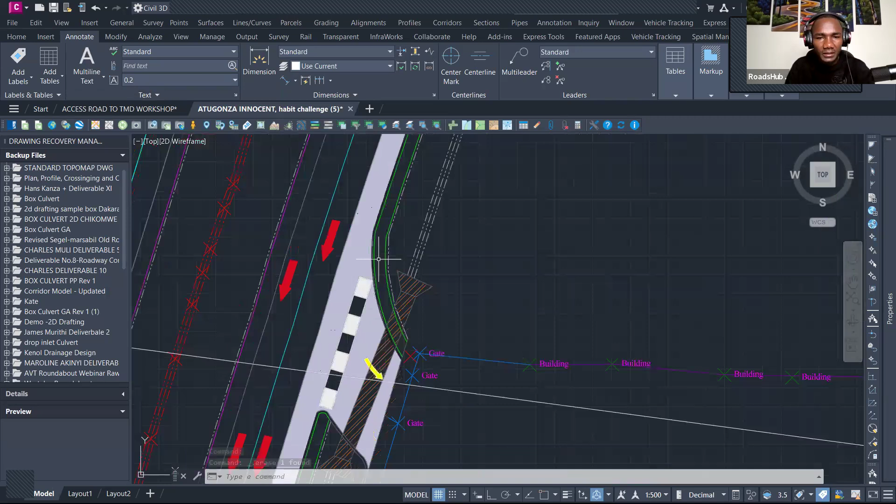I'm looking at the geometry at this point. This looks good. The vehicle can be able to maneuver. I would like to know what exactly is the width at this point, because if we check that, okay, 3 meters. That's perfectly good. All right, fairly good. The culvert is right there, well positioned. Remember, we said that there should be a safety aspect at this point, at the central island for the property. Sometimes we prefer having bollards because remember, this is like an additional lane that you're handing here.

And sometimes the authority may not require you to have this, because it may encourage a U-turn for most people or for most of the drivers at this point. So you can introduce bollards at this point so that you close it, so that even the main traffic does not use it as a place to do unnecessary overtaking and overlapping.

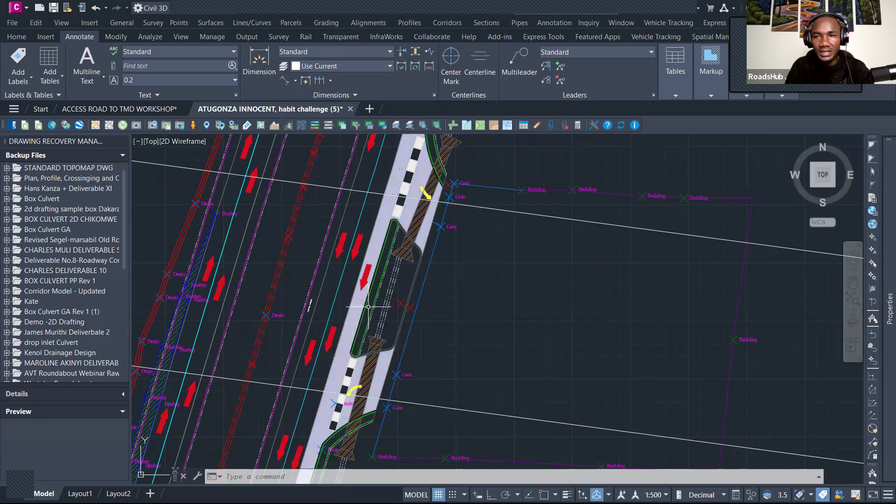Because if they do that, then there's a high possibility that they will cause a collision with the vehicles that are coming from this point, or they will use the deceleration lanes as a point to overtake. Therefore, that is why there is need to have safety barriers here, bollards, and of course restrict this section. It will also improve the safety of the pedestrians who are walking around this section.

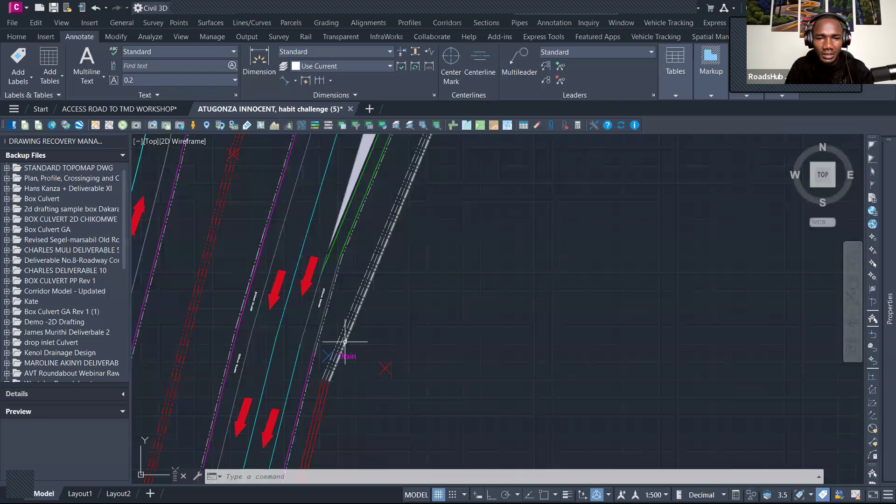All right. But I'm worried this angle doesn't look very nice at this point. So the turning may be difficult here, but that is fine. You can check it. I don't know why you are having two accesses here. But anyway, I will just assume that probably you have another road at that section. But generally, this is a good perspective.

This gentleman decided that for him to have a U-turn at this other point, because of the restrictions in the size of the central island at this point, he decided to have a jug handle, kind of an intersection here to divert traffic from this point to move it over here, which is a smart move. But then again, it's dependent on the amount of the road reserve that you have here. I like it. It's good to see that you're implementing that.

And for example, if I take a look at this one, this is 43, a bit below the radius that you expect. I don't know what is your design speed, but because you anticipate this is a very low speed section, we can say that the design speed is probably something like 40 kilometers per hour, so that it can allow such a small radius. Okay, this is fairly good.

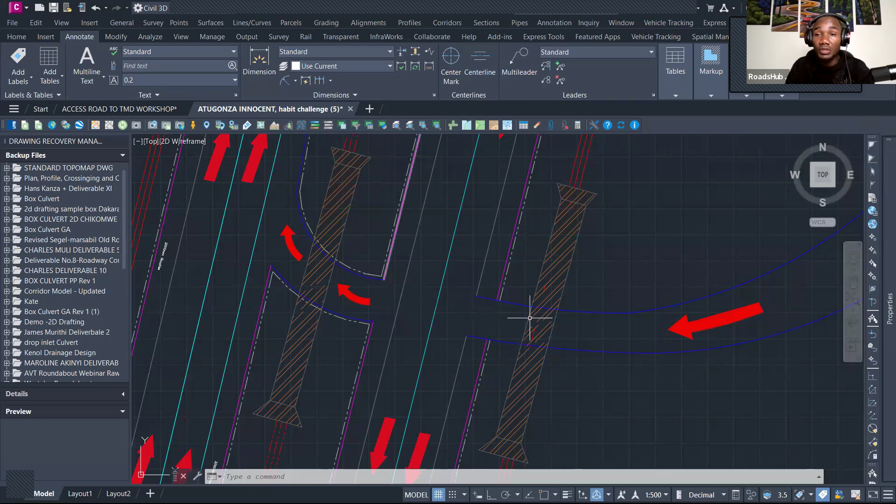But this means, because this is now a crossing, remember you're introducing some additional conflict points here. This is always the challenge. When you bring another solution, it will always bring a new problem in the intersection. And therefore, it's bringing more conflict points here because now it's crossing the entire highway. But the beauty of it is this one can wait until the road is clear.

In some instances, such an intersection may require signals or may not require them, depending on the traffic capacity or the traffic volumes that you have within your section. That's good. I like that you're experimenting with new concepts, which is truly amazing.

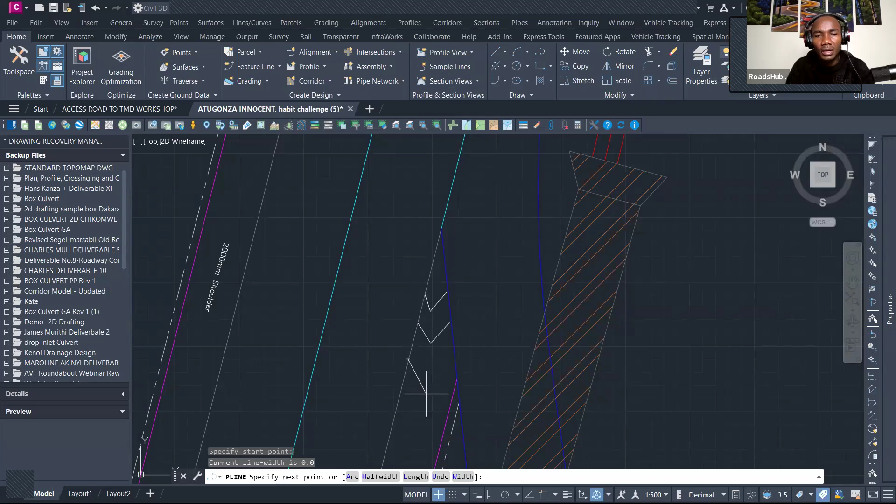Okay. Remember also when you're designing, this section should be a chevron. Chevron is a marking that is showing the direction of traffic. So there will be some arrows that look something like this. I don't know whether you've seen this on the road. They are called chevron markings, so that the motorists are guided accordingly to move all the way to this section, so that it does not become a black spot for motorists to cause accidents at this point.

Remember also it needs to have curb on this edge and this edge to protect this specific section and demarcate it, not to cause accidents at that point. But generally, it's good. It's always good to see you guys experimenting with other concepts. I would like you now to share it out with other people so that you can get feedback on what you need to do.

This is my only area of concern. It doesn't look like you put so much thought on it. So please think through it. Refer to a session where we were reviewing Engineer Samuel Munoru's work, and you will see that this is not very feasible when it comes to the turning of a large truck vehicle. That's my feedback for you.

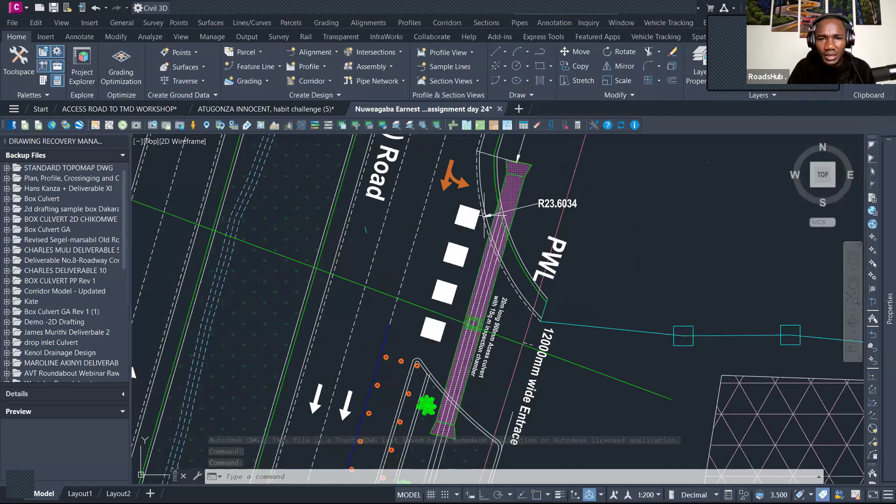There was another gentleman who sent in his work, but I don't know whether it's up. There was this other gentleman here. He's calling himself Earnest. This is Earnest's work. So Earnest has done a very good job. The annotation is good.

Yes, he has implemented the safety aspects that we talked about, especially for this section. Remember, when you are opening this section, it's not a road section. That is what we were talking about. The culvert is well aligned, but now the problem is you don't have drainage on this upper side. So the question is, where is this culvert?

What is this culvert doing here if you only have drainage on the lower side and you don't have drainage on the upper side? So that's something that you need to think about as you get to finalize your design. Your design should be complete and continuous. So please take note of that, Earnest, if you are in this very session.

Also note that it would be economically unfeasible for the developer to continue constructing the walkway all around the road section all the way to the end. So sometimes you need to terminate it at some distance here so that the next developers or the government can proceed installing the walkways on the other side.

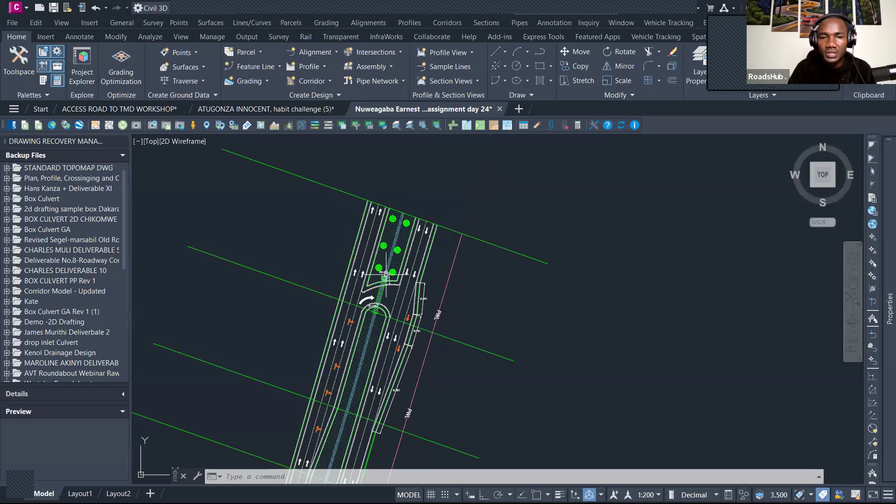There's no developer who is willing to do all of this for like 1.5 kilometers. Unless, of course, they want to connect it with the intersection here or the U-turn here. That is when they can proceed. This is always a topic of debate, especially when it comes to the practical implementation.

The radius here of 7.37, this of course allows the small vehicles to be able to turn. Again, I told you this section, you will need a far much wider section here to allow the turning of the large truck vehicles. 3 meters is not sufficient, and I think we saw that depending on the design vehicle that we're using.

For this intersection, the passenger car and the medium trucks can be able to turn, but when it comes to larger traffic, it may be a bit of a challenge to turn around this section.

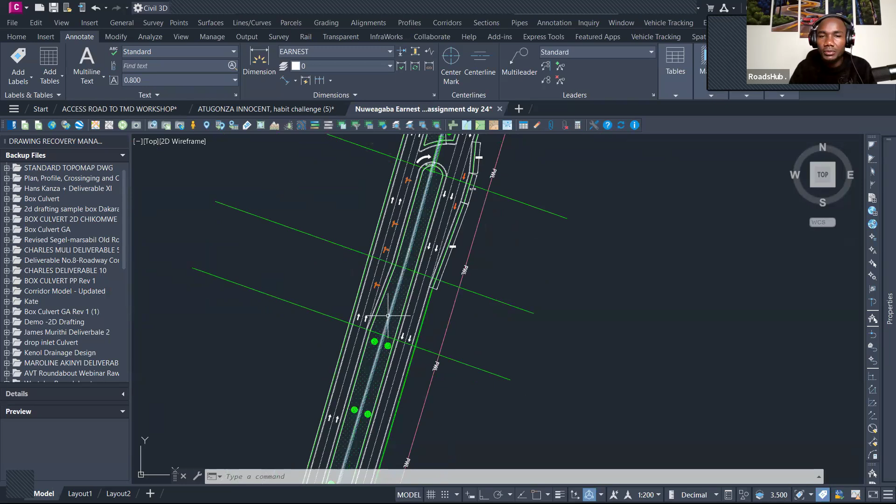I know most of you are asking for the vehicle tracking. The vehicle tracking comes with a license, and I cannot issue the licenses to you guys because they are already fully booked. We don't have any extra slots; we have already given them to the people who are already in the program, so we don't have extra licenses.

You cannot get the vehicle tracking as a crack version. It's too difficult. You need a license to access the vehicle tracking. I saw a couple of messages and I decided that I would clarify that during this session right here.

Okay, super. I like this. This is a well done design right there. It's appealing. I like the choice and taste of your colors. And as you've noticed, you only become good when you do this. And I will always repeat: you may think that you've known it, you've been listening to it, you picture it in your mind and all of that. It's only until you do it. So I'm encouraging others to do it.

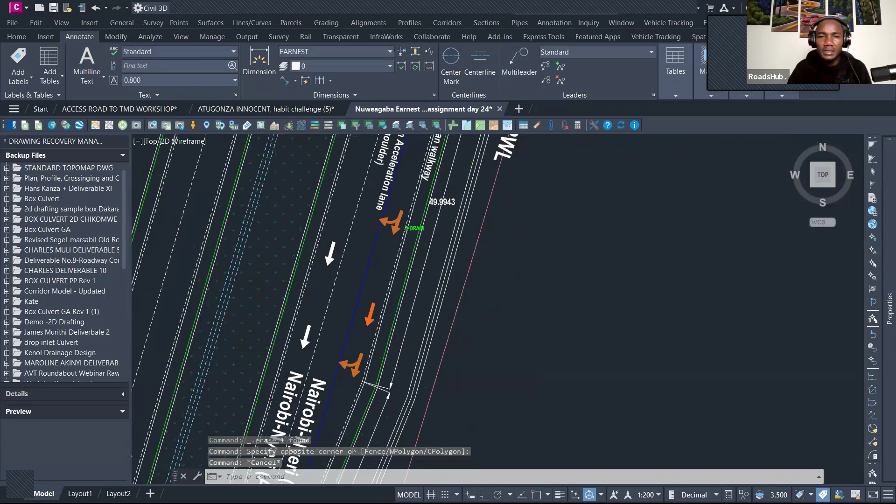Then when it comes to showing what you're doing with your drainages, drainages are best shown using broken lines so that we can see them. So please think through that. When it's a solid line, it gives another vibe, so to speak. Yeah, but this is good. I like it. Let me see this other section.

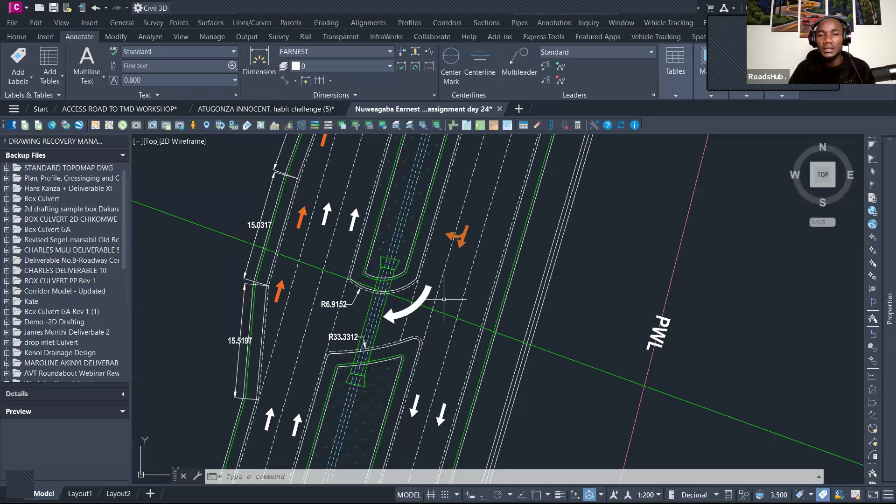Okay, your radius is 6.9 and the same concept. This concept could be very good on paper, but it needs to be tested using the vehicle tracking, or rather the swept path analysis, so you can see the performance in real sight. But this is amazing. I love it. I like that you guys are getting yourselves out there to do stuff. I'm super, super proud of you.

So to this effect, I'm going to jump straight to preparing for our presentation, like we earlier said. And one of the things that we're going to use is this specific title block. That is the work that is here for us today. And therefore, how do we approach it? How do we get to start our work for presentation? And how do we prepare for this?

I know for those of you who have probably completed one of our trainings, we've been working very hard with Hans Kanza to make sure that you get to do your production very well. But even for those of us who have not been able to do it, then we can do it together. Just as a recap, we have 3 sections within a title block. Like you can see, we have a section that is going to have the viewport. So this is the section for the viewport where the drawings will be presented.

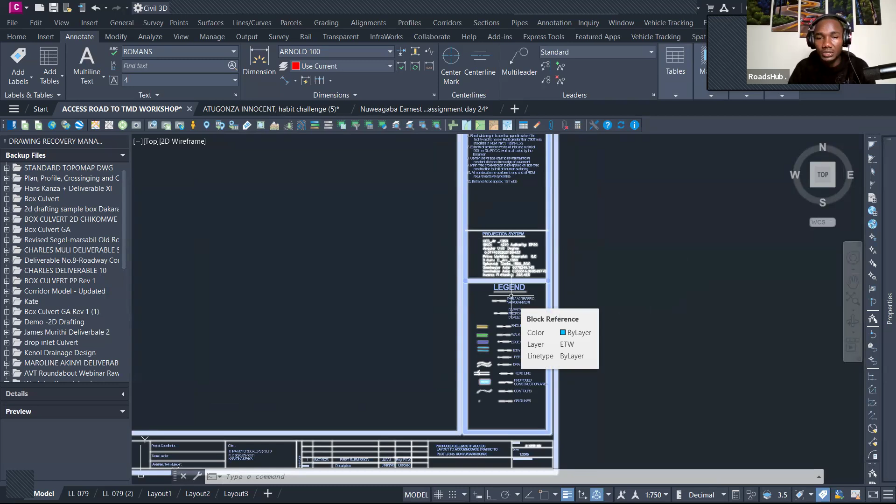Over and above that, we have the bottom one, which is showing the project details. And of course, this is going to vary from project to project. So let's get into it. I don't want to use my own design. I can go to this gentleman's design. I think this is Ernest's work, and I can use it to display or to create that specific title block that we have.

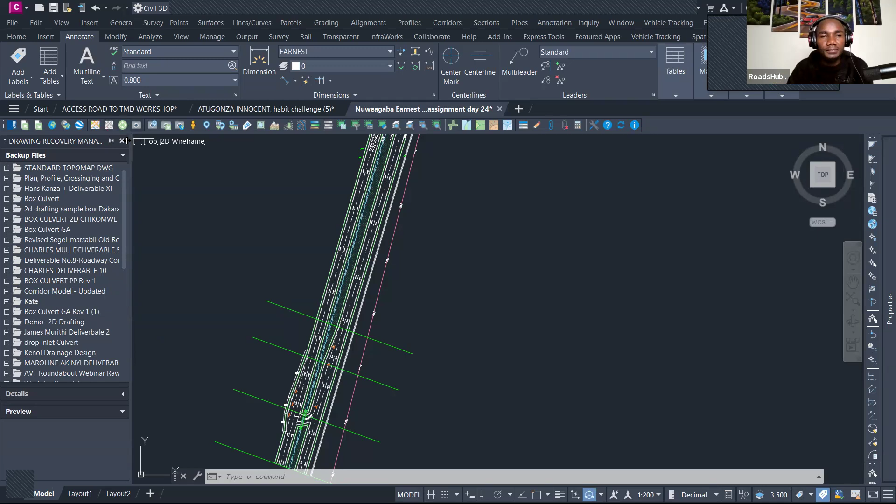So the other thing that I wanted to bring is when we are talking about title blocks, Autodesk has already given us some samples. It has some already existing types or samples or templates for title blocks. So there are people who would prefer to use those templates and then customize them. And then after customizing them, they can use them in their own project.

That is one approach. The second one would be, of course, starting your own design from scratch. And therefore, this means you can just design your own template, come up with your own. I think that's easier. It allows you the flexibility and ability to customize and then just have your own preference and taste on that one. So let's get into that.

We're going to go to layout. And once we go to layout, remember this one, there are two ways. We were in the model space. So this is where we do the drafting and all of the work. And then after that, you go to the layout. And in the layout, that is specifically where we are going to do our presentation for the design. This layout has different aspects. It's called the paper space as well.

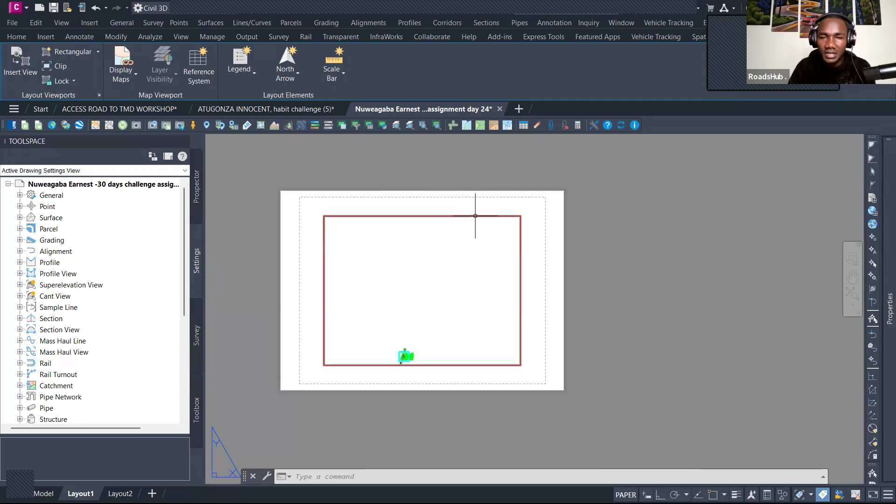Remember, you can toggle between; if you go at the bottom of your screen where we have the quick tools, you have the ability to switch from model space to paper space. So at the moment, it's showing that we're in the paper space, and this is where now we do our drafting. The red thing here is called a viewport, and therefore this is where we get to select the elements that we can show from the model space. So it zooms, it's an area to view what is already in the model space.

But that is something that we don't need for now, so we can delete it, and you can always create it using this option where you can say we want to insert a new viewport.

I'll show you that in a minute. Now, there's something that I want us to do.

I want us to look at this contextual ribbon that is at the top of our layout views. The first panel is the Layout Viewports, where you can control the viewport, the one that I've deleted. You can see the first icon is to insert a viewport.

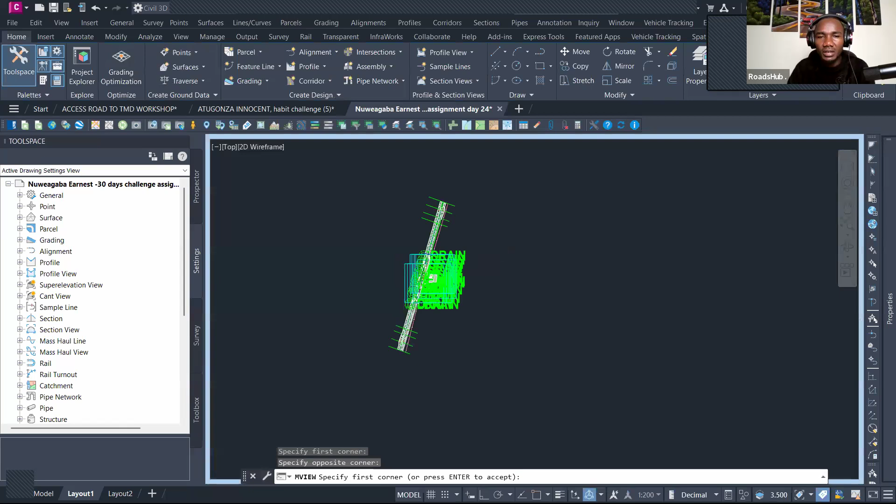This one means we want to go directly to view a specific section of this element. So that is one way of inserting it, and you can see that's how I've done it. It has already shown that selected section that I have brought into view here.

I'll repeat that again. I can delete the viewport right there. Then in this contextual ribbon, I can say I want to insert a view. This is where you insert a view directly or automatically from the design itself. So I would come and say I want to have a view for this section.

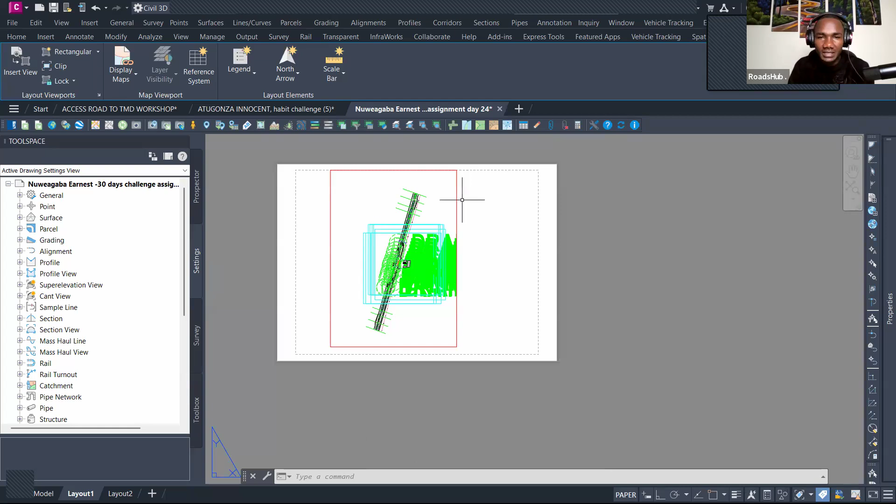Once I select it, I press enter, and this view will directly be projected into my design. So I can specifically show a specific element or section of my design that I want to show here. That is one way.

I can delete it one more time. There is another section where I can create a rectangular viewport. This means I'm just going to highlight it on the viewport, and it will display the selected rectangle, projecting what is now in the model space. I know you're wondering why this one is looking so weird and out of place, but I'm going to take care of that in a moment.

Now, the second thing we need to look at is this viewport can be edited. You can squeeze it, make it bigger, make it smaller, or even have it at the top of the section. It's just like a polyline, just like a window—you switch it out to sections that you want to display.

Remember, this viewport's scale can be locked or unlocked. If you go to the last section, there is the lock and unlock option. For example, this one looks like it's locked. We can unlock it by selecting unlock, going to this one, pressing enter, and this viewport will be unlocked.

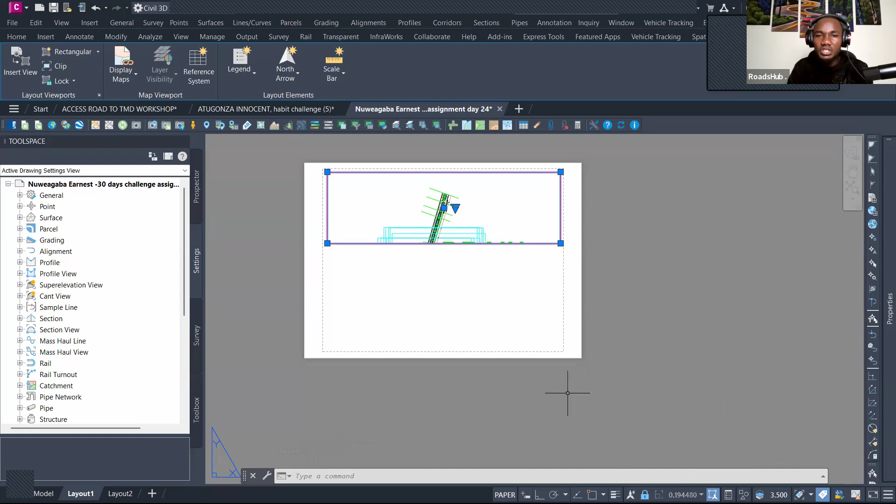The other way is if you select the viewport, at the bottom corner there is an option to lock or unlock it. When you lock it, you cannot modify anything inside the viewport. But if you unlock it, you can right click inside the viewport and modify the display that is there.

The second thing is the viewport has a scale. If you select the viewport, at the bottom next to the lock, we have the scale of the selected viewport. The reason our design looks distorted is because this scale does not commensurate with the scale used in our model space. So if you select the drop down, we can set it to, for example, 1:1000.

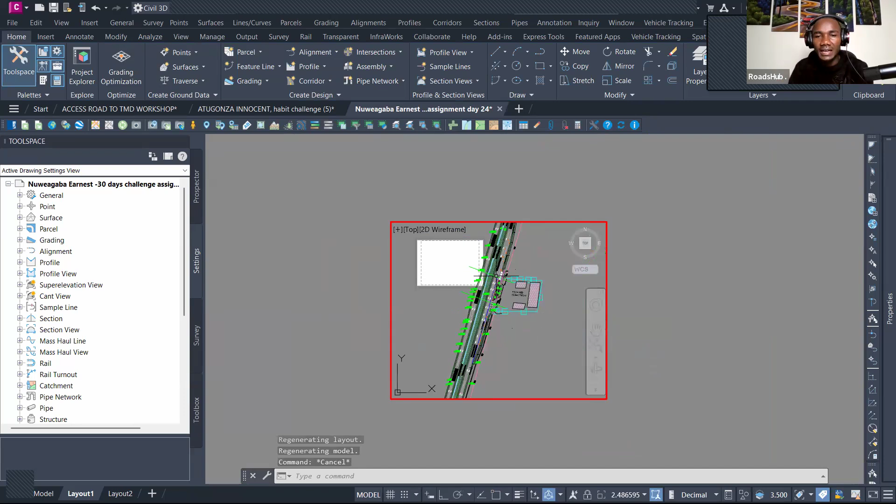You can see the display has dramatically improved, and we can possibly see the different elements here. If we right click and use REGEN, it refreshes so that the paper space can adapt to the scale we have used. You can see the elements now are being displayed better and better—we can read and see everything in detail.

So that is just a play around with the viewport. Remember, if this is not very visible, you can tweak it, return it back to the paper space, and always use the viewport as a tool to play around with.

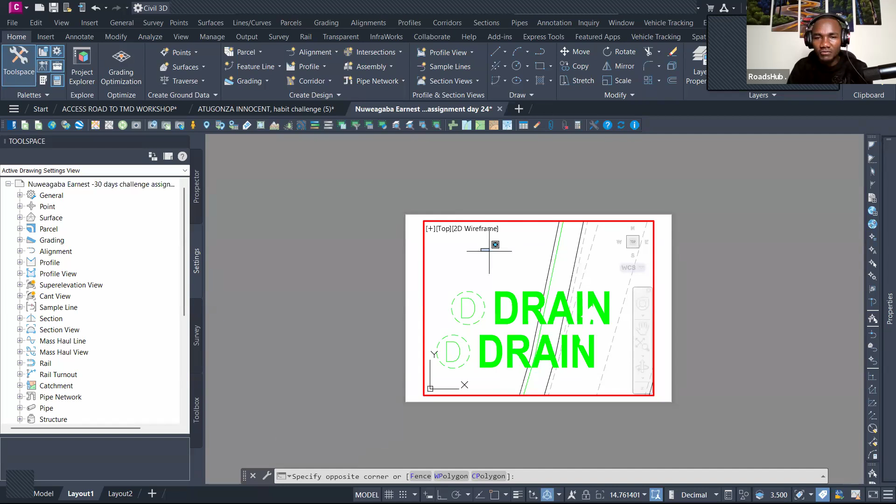For example, the other option is this one extremely zoomed. You can right click or double click into the viewport. This means we are working in the viewport, and you can use the zoom icon to bring your design into perspective. You can see everything has been brought into perspective, fitting into your design. Then escape and click outside the viewport, and you see everything is extremely visible if you zoom out.

This is work that requires you to be a little bit careful, easy and relaxed. Don't be in a hurry to work with it. It's something that requires just playing around with it until you get to master how this works for you.

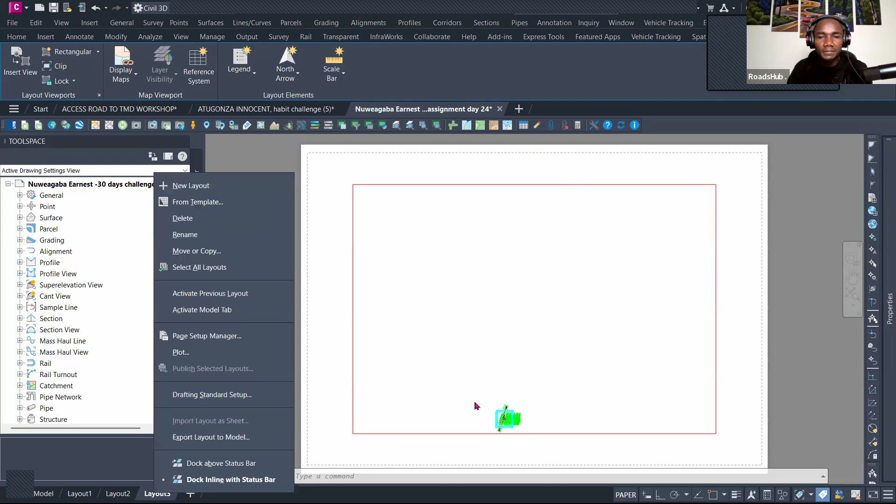Now let's go into preparing a complete, brand new paper space or layout. I want us to go and delete this one. Remember, you can always delete all of them. You can even delete this other one. This is what we worked with, so we can also delete the second one right there.

I want us to use the plus icon. This is now the step-by-step of how you are doing it. I was just doing a preview of some of the things that we'll be using, and now I want us to go to the step-by-step process.

The first thing is we want to create a new layout, so this one has called itself layout number 3. Once we get to layout number 2, we are going to right-click the layout, and then we want to rename it first. So what do we want? We want plan layout, and then we can call it A1.

So probably we are using paper size A3, or if you want to use paper size A1, you can be able to rename it so that it's super clear for you, then press enter. At the bottom of the paper space, you can see it's called plan layout A1.

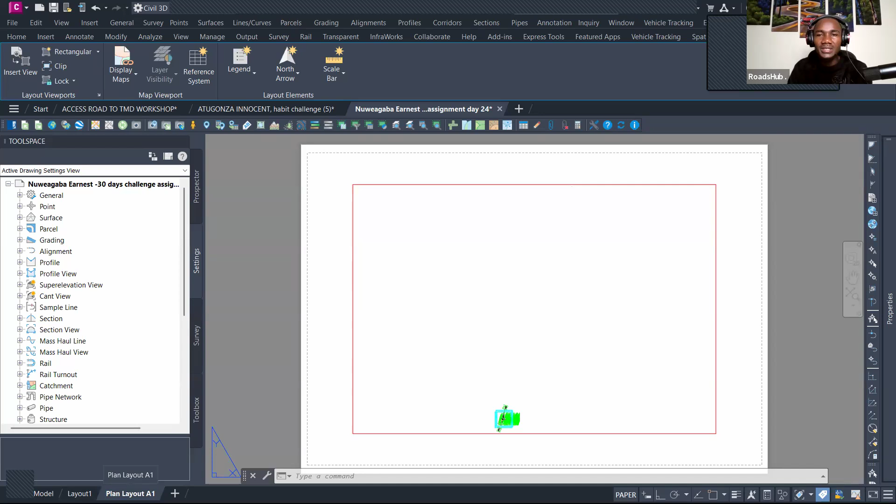The second thing we want to do is set this paper space to be specifically the size of the A1 paper. So how do we do that? We select the plan layout, right click, and once we right click on this one, we go to page setup manager. This is now the page setup manager displaying on our screen.

Remember, this is where you can also modify all of the other layouts that you have, and in this case you can create a new layout as well, or create a layout from here. But in this case, we want to modify.

Most importantly is the plotter or the printer. Remember, in this case we want to generate a PDF, but you can also generate directly to a printer - this is the printer connected to my desktop. But if I wanted to go all the way to AutoCAD, there is something called AutoCAD PDF high quality print. That is what I mostly use, and that is good enough for me.

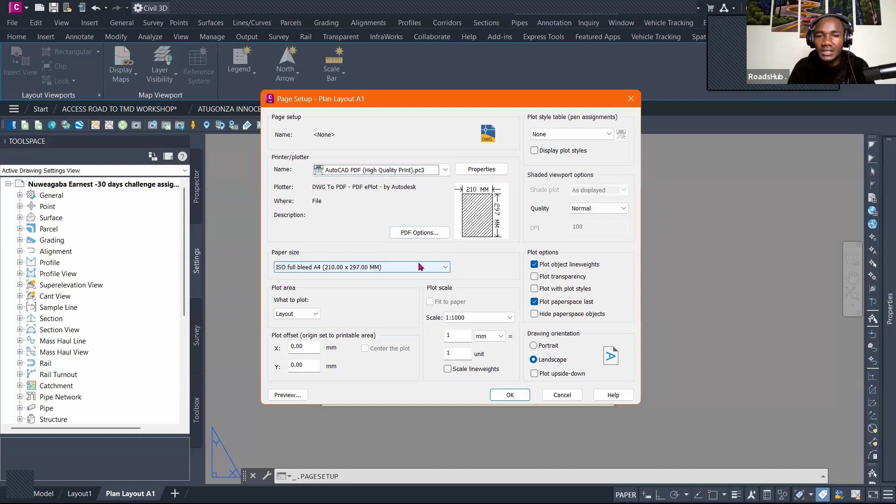Then after that, we go and select the paper size. Remember, we renamed this to ISO A1, so I can go to ISO full bleed A1. And remember, if you go to the bottom right corner, you will see the drawing orientation - there is always the option for portrait or landscape. So this is where you determine how you want it.

So for the portrait, you can see this is 420 by 297. If we wanted an A1, the A1 is right here, which is 841 by 594 - these are the dimensions. And remember, I always prefer using ISO full bleed A1, yes. It covers the entire space very well, and the scale is easy to modify, and when you go to printing, it will fit in very well.

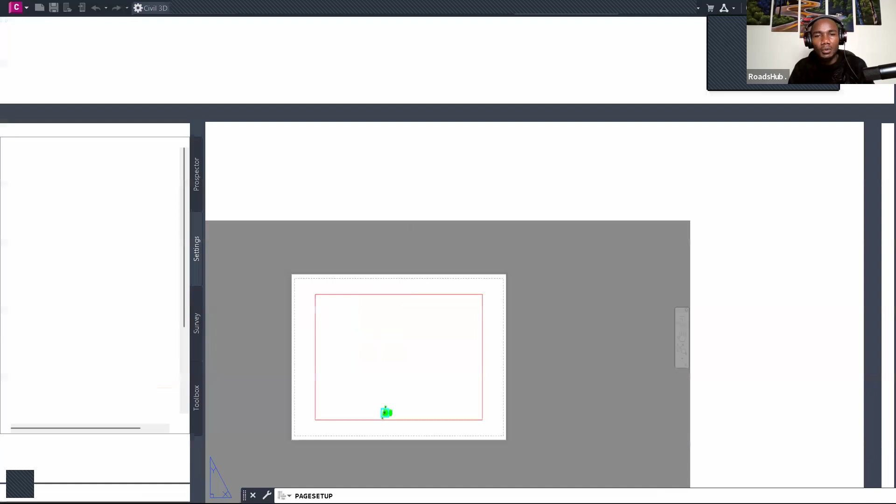Once we do that, you can preview your paper space, how it will look like. So this is how the paper space will look like, that's the size of the A1 ISO full bleed. The other one is the quality here.

I would want it to be maximum quality. Of course, this is going to impact the plot time. The other one is the drawing orientation. I want it in landscape. If you want to set it as portrait, it will also be a portrait in this case.

So after I do that, I can set OK, and then close it here. You can see now the paper size has increased. Remember when we were using the other one, it was an A4, and you can see where our viewport was. But now you can see this size has dramatically increased.

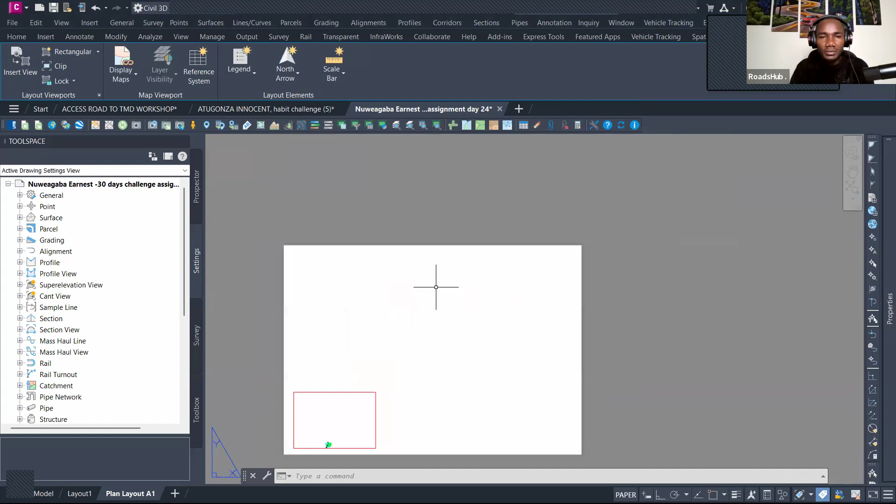So let's go down into creating our title block. I'm going to go back to this design and just look at it. You can see we have 3 sections: a section for the notes, a section for project details, and then a section to display the design. And above all that, we have this whole rectangle that is here.

Please note that there is nothing complicated here. It's just a matter of playing around with polylines. So for example, I can create a rectangle.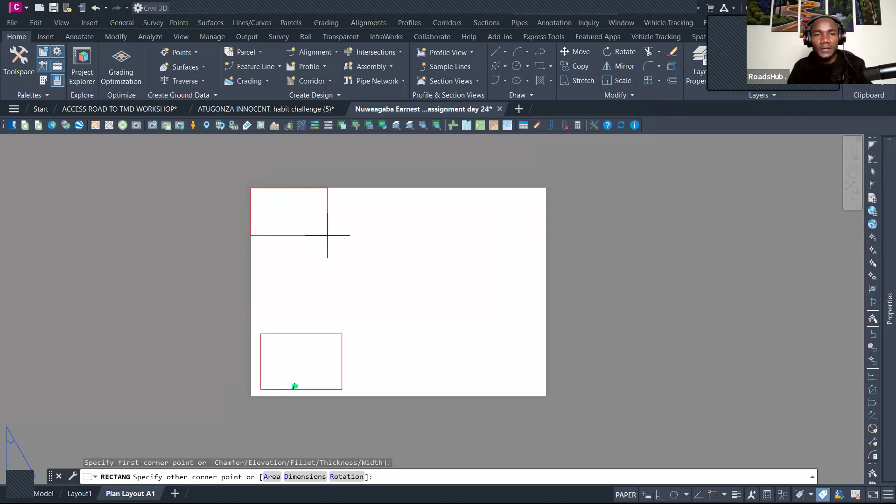The other thing that we need to look at is the layers. So we can create a new layer. Once we go to a new layer, we can call it title block. And then we can choose the color, so for example, we can say we want it to be white.

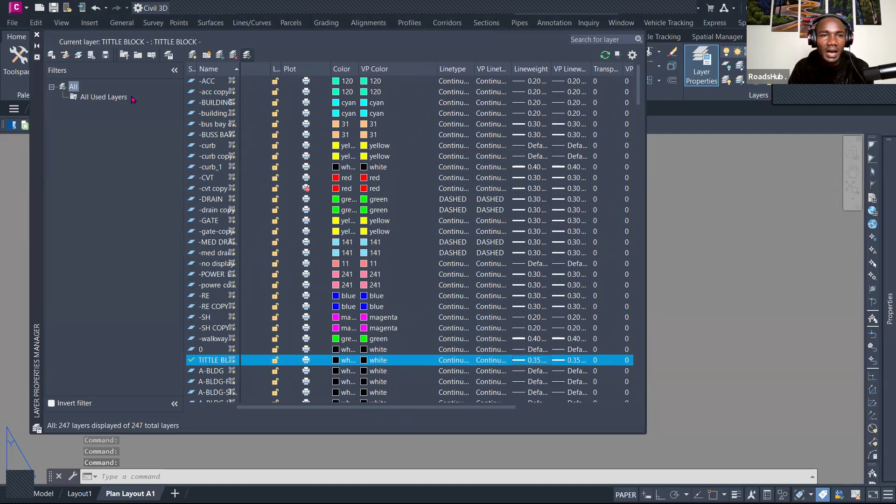And then we can choose the line type. It's continuous. The other thing is the line width, so we can use a bigger line width, a thicker line width, because we want to have a title block in this case. And then we make it the current layer, and we can exit at that point.

So come back to the rectangle, and we want to demarcate the entire section to have a rectangle all the way to the edges right there. Okay, so that is it. That is our first edge of this one.

So for example, we would want to offset it. Remember, we showed just a small offset. This one can be an offset of probably even 25, 0.025, and then we can have it there. Remember, these ones are very small. You don't want to have a very big offset for the section.

So after that, we can actually delete the viewport. We don't need it for now. Therefore, we want to demarcate this into 3 sections for our project, and the first section is where we have the project details.

So we can select another rectangle, and for example, in this case, we can say we want to have it here. Remember, there is a process where there are some templates that have standard dimensions for your title block. So for example, there are people who would say, I want mine to be at 60 mm in width. Others will say, I want this one.

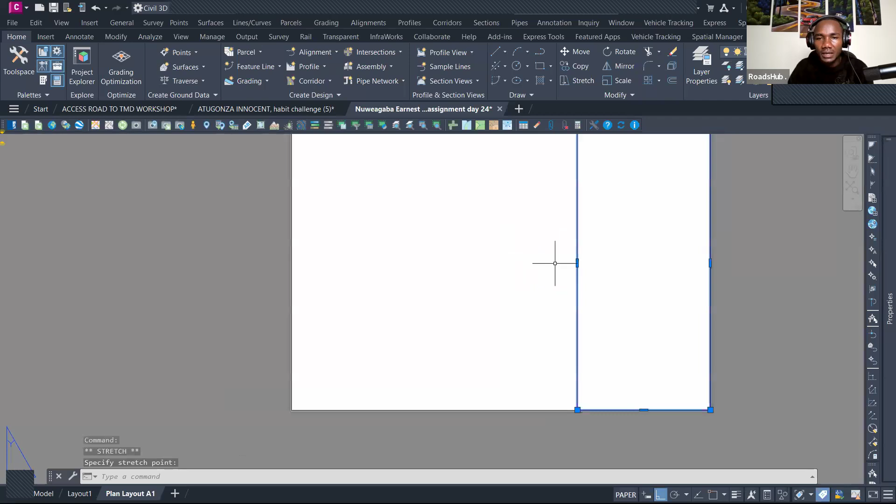But in this case, you can just decide to give a section that is good enough to accommodate your notes. So we can decide we want to have our section up to this point. And then I can make it probably just a little bit bigger. Remember also you need to turn on your ortho mode to ensure that, so I can make it a little bit bigger.

Probably that section is fairly good. You just size it, because also remember the size of the projects you'll be working on will vary in size, and you want the display section to be the bigger thing, because we'll be having the display section here, and we'll also be having another section at the bottom which is going to display our project details at the bottom right here.

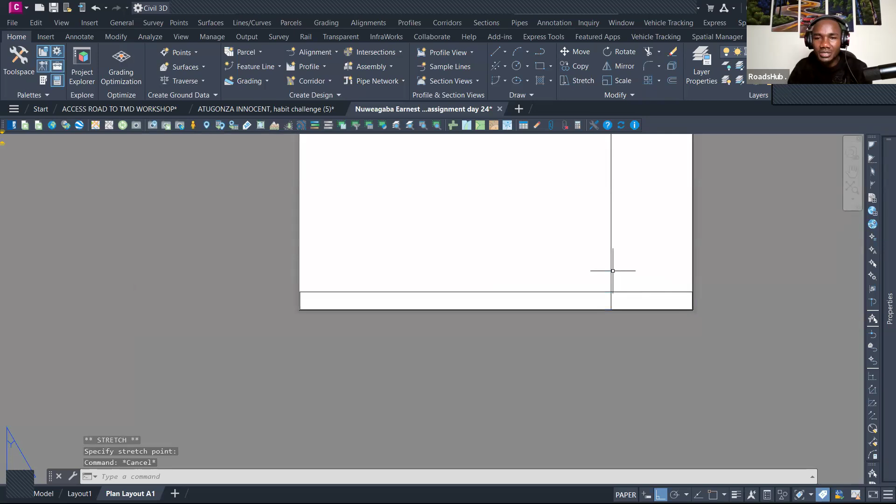So there are instances where people will tell you, I want my title block to be of these specific dimensions, I want it to be this one. And therefore, I don't want to go into that because it can be a little bit confusing for most of us.

So I want to assume that we are all working with just a rough picture of what this would look like for us. So this one can terminate to that specific point. Then we also make sure that this one is hinging at that point, and this one is hinged at a specific area. So once that is done, I would like now to have the titles.

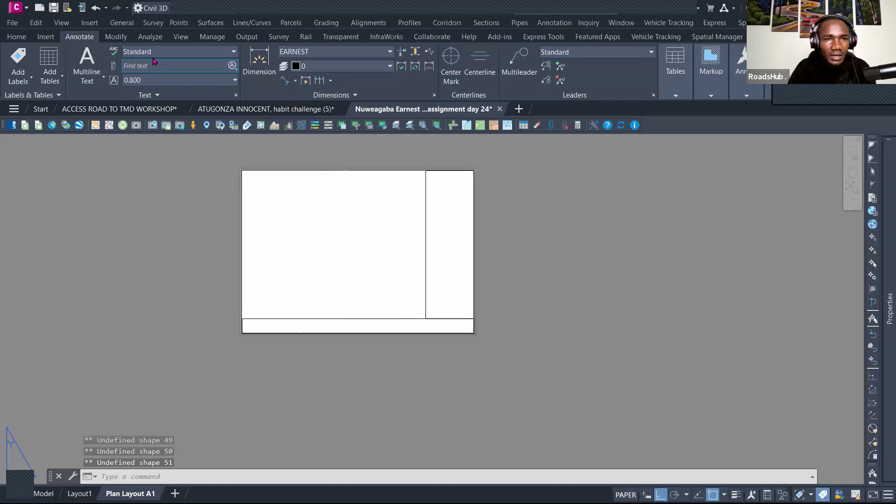So I'm going to annotate. And I remember this gentleman has created a dimension style or annotation, yes, and dimension style that is called Earnest. So I'm going to use that text, probably, if I can find it. I believe it's the standard. I don't know whether he doesn't have a text style. So I'm going to use the text here, and then I'm going to have it at this point, and then I'm going to call this engineer's notes.

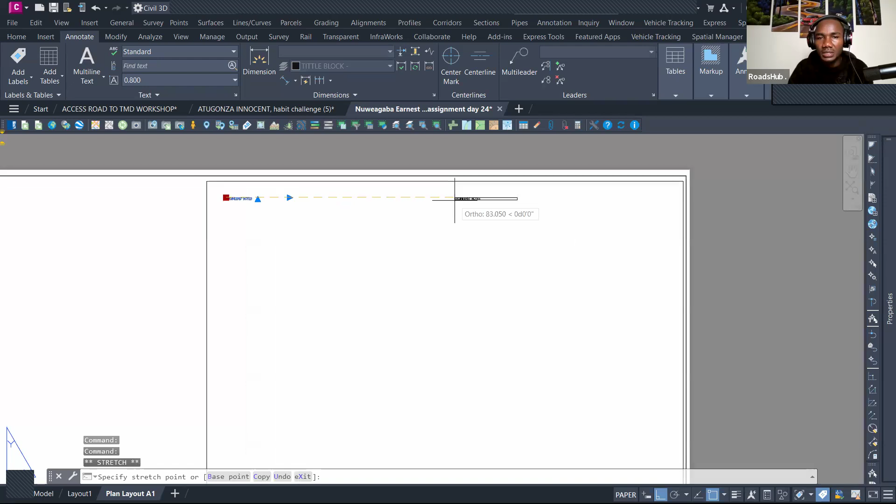Engineer's notes. Once I do that, I can minimize the size for this section. This one should be engineer's notes or site notes. This also depends on how you want to name it. We can see the size here is very, very small, or even our margins are bigger. So we can move these a little bit, probably to this side. And we can also even reduce the size of our text. Remember, the goal is to have it as maximum.

The other point is the text expected here is always 2.5 mm, 2.5 millimeters. Font size is always like the standard type of text that we are expecting to have in most of the design work that you have. So when your text height is primarily 2.5, it's fairly good enough for you to do your presentations very, very well. It will display well.

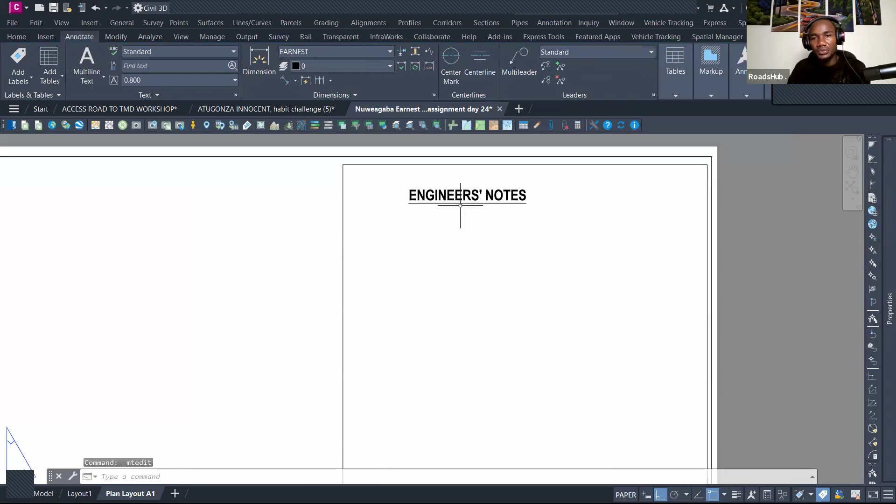So this means also we can narrow down our title block. Remember, you can select these if you want to underline it. You can underline it. And also, if you want to change the colors, you can change it. So those are my engineer's notes. The other point would be demarcating this section. So for example,

you can decide, for example, to just have your random line here. It's a matter of what dimensions you choose. Most people will say, I want this spacing to be 10 centimeters. Others will say, I want it at 15 mm. Different people will choose different sizes. There are, of course, standard sizes that you can look around for the title blocks.

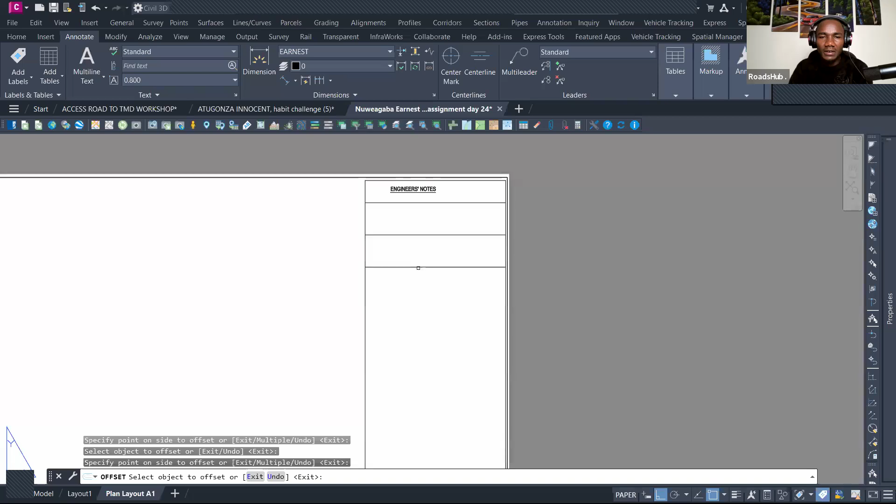But I think we can have an offset, from this point, of 20. So let's say offset, we wanted to have 20 in this case. So that's it. In other case, we can have another 20, we can have another 20. So this is like 100. We can say now this is a section for notes. If this is the section for notes, we can have it there.

Remember, you can go to having a bullet or numbered, and this one: all dimensions are in millimeters unless otherwise specified. Remember, this is a section where you include all the instructions that you want to give to your project team or the implementation team.

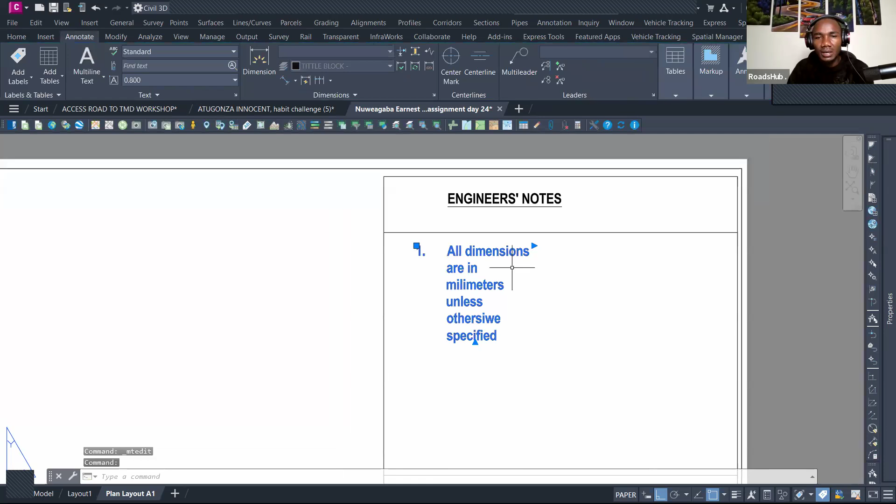Remember also the text height needs to be 2.5 for this case. 2.5 is the standard dimension that we want to have for our section, and then you have it right there. So at least everything is for me. This is for your notes. We can go back to this section and see what else we need. So you can see the section for engineer's notes, it's quite big. After that, now we can have a section for projection system and then the other section for legend.

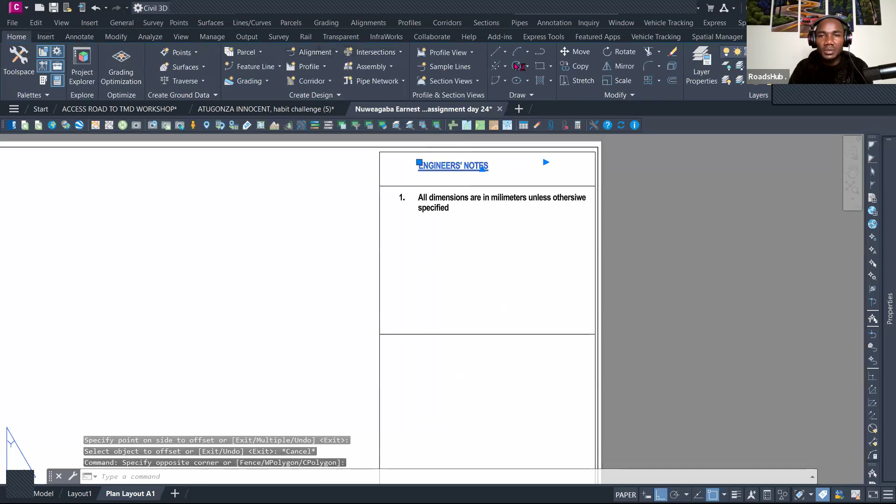Let's go to that right away. We can offset these. We can get offset, and then we want to make it 100 that way, and then we make it 100, and then we make it 100 for that point. So in this case, we just need to copy the title, and then once we copy it, we can lower it to this point, to this point, and then to this point, and then to this point. Great.

For this area, we can just delete this one so that we have a bigger section for engineer's notes. They take the bigger section. And in this area, we call it projection system. So remember, in the projection system, we used ARC 1960. So we can copy that one to this area. So in this area, you want to say what is the coordinate system.

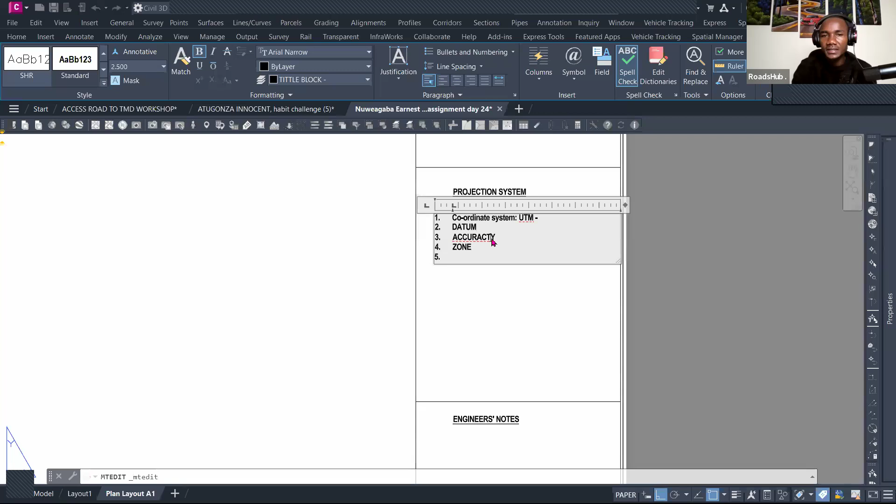So you can say UTM, whatever coordinate system, and then you want to show the datum, you want to show the level of accuracy, you want to show the zone. All of that information is needed here. So you can just search on Google and see what details you need to have in a projection system. For example, you can also use my template here.

For example, you need to show the GCS. This is, of course, Arc 1960. You need to do the authority, the angle unit for this one. The meridian, the datum. All of this, I'm going to share with you so that you can get the projection system details that you need. After that, we are going to go to the legend straight away. And this is now where you have the legend. And then you're done with that section.

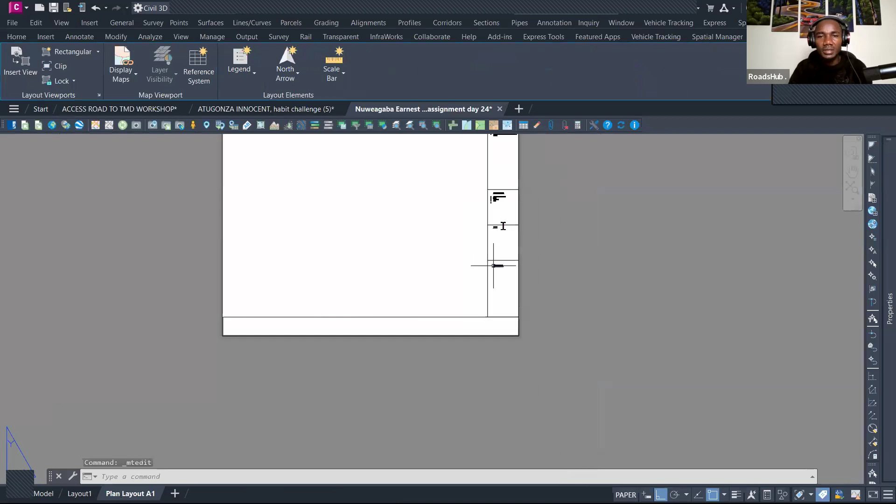And then this is where also most people will want to have, for example, the project details. And when you are talking about project details, we can talk about the location, the jurisdiction, and all of those small details. For example, the county, the zone, and also the addresses of the consultant and all of that. So for example, we have the project details. In this zone, we can do an offset of 100, or 50. Yes, 100 is fairly good. So we can say project details.

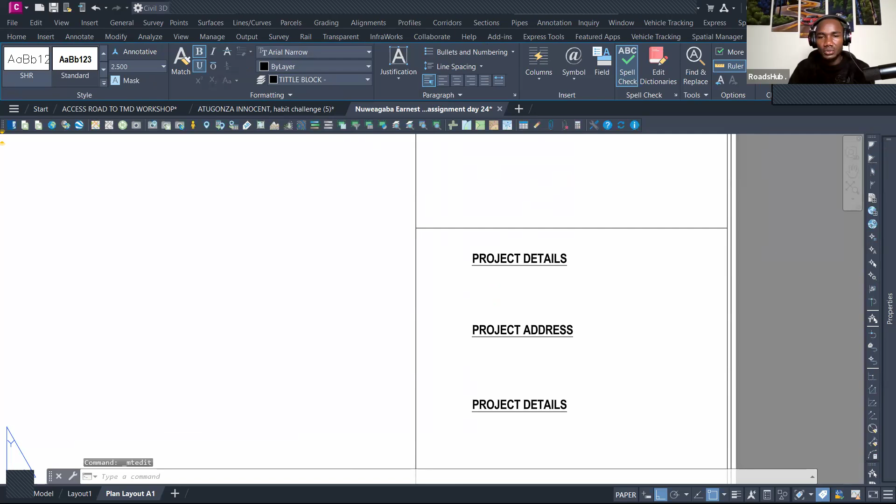So for example, we can say we want to include location, address, and all of that. So we can say project address, and you can populate it there. And then after that, you can have, for example, the project team at this point. So this varies according to your preference, what you want to include in this section. For me, I prefer having the legend only, and then it fills every detail here, because at the bottom here I am going to fit in the other information that I want to include.

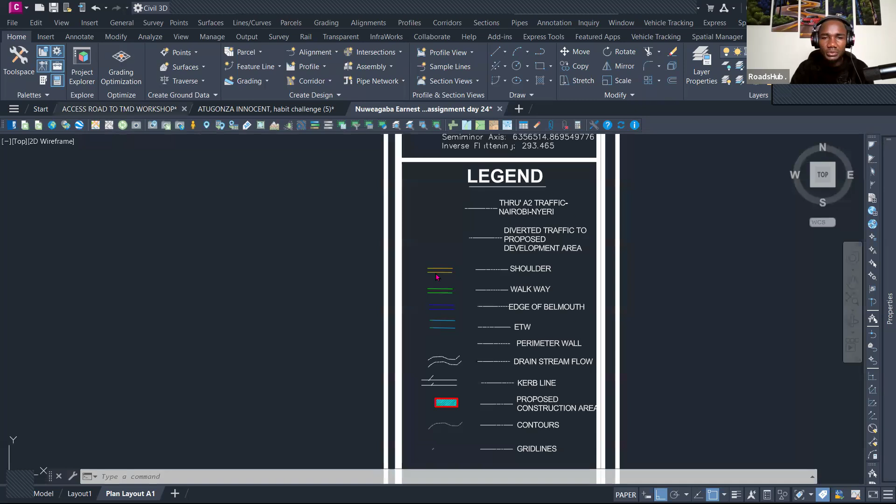So we are going to this other title block that I have, and you can see the first option here is always the client. You will always have the client here. The client could be whoever you're working for. If you're working for the government, then this is, for example, Kenya National Highways Authority, or whoever. The next one will be the consultant. Remember, there are people who prefer having the consultant and all of that information on this other side, which is perfectly fine. The title block is sometimes according to the template of your company.

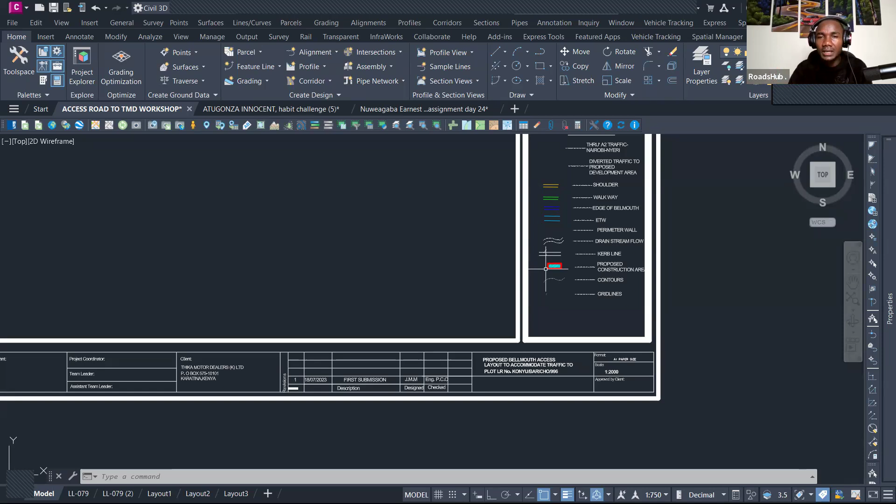How do you want to present your work? And what details do you want to show in the project? Other projects will come with specifications: this is how we want our design to be presented. So it's important for you to have that flexibility. So let us just copy paste what is here. And this is the beauty of having other sample projects. You will find that different projects have different presentations for their work. So just pick whatever you prefer and think works for you. For this case, we are going to adopt everything as it is here.

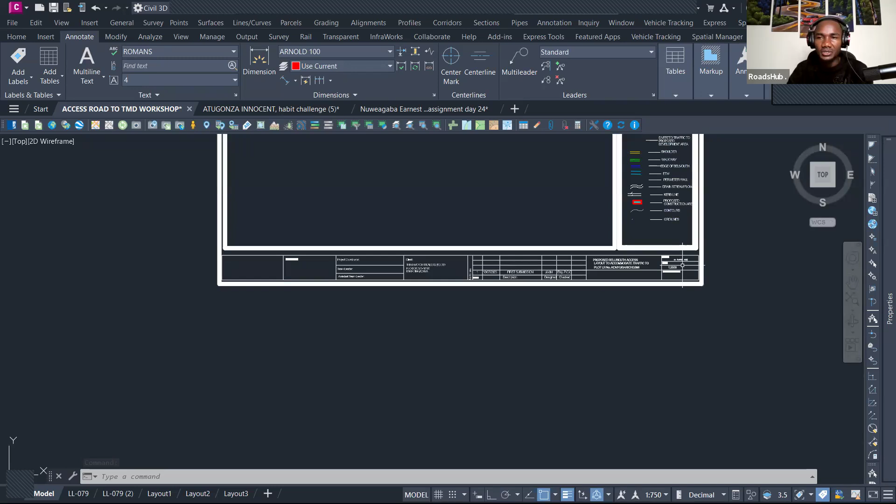So for example, let's go to this box. Let's first know what is the distance from this point all the way to this other point. This one is giving us 835 mm. So we can divide this into 8. How many sections do we need? We need 1, 2, 3, 4, 5, 6, 7 sections. So we can do 100, 100, 100, and then split the other sections equally. So we come to Home. We can explode this section so that we'll be able to offset, and then we do an offset of 100, press enter, and then 100 for that section, and then 100 up to that point.

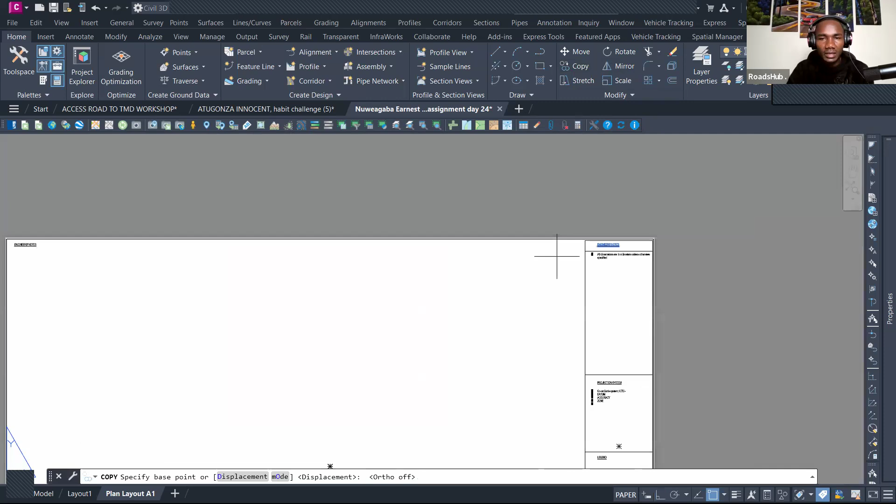So we're going to copy this very same header here, copy it, come down with it here, and then I cannot see where it has gone. Let me just copy it. This one is at the top here because ortho mode is off. So I'm just going to copy it from this point.

And I'm going to paste it here, and then paste it here. Super. So in this case, we can say this is the client details. And in the client details now, we can say copy. And then, for example, in the name, in the client details, there is always a higher probability of having the logo and the name of that employer.

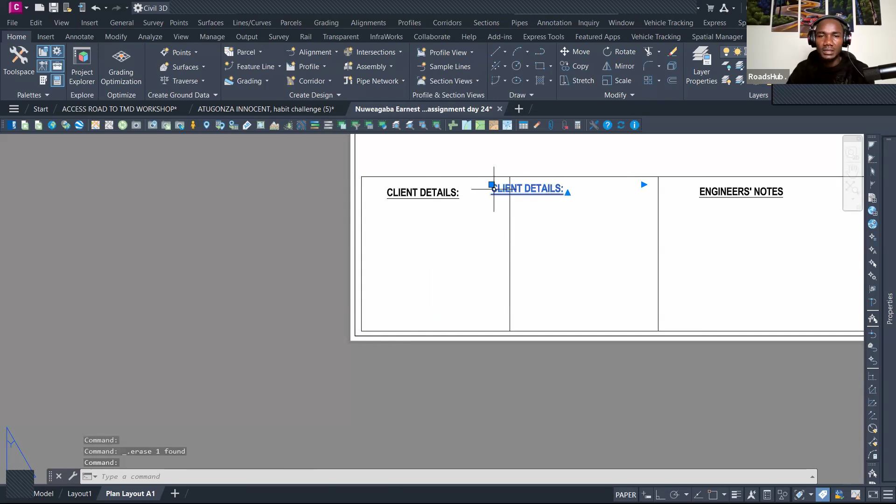So we can say offset, and then we want to offset this by 50 from this point. Okay, 50 is too much. Let's offset, and we can do 25. So that's it. Delete this point, and in this area, you can have the text there.

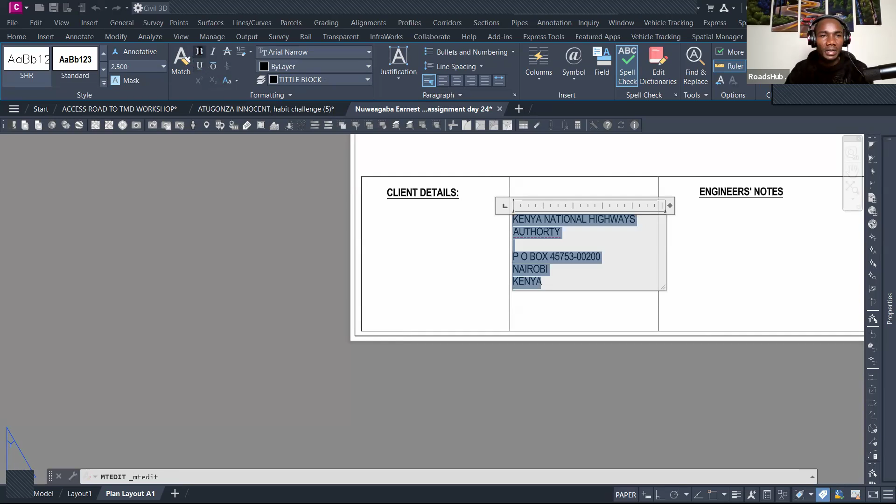And then, for example, we can say Kenya National Highways Authority, then P.O. Box 45753-00200, Nairobi, Kenya. Whatever that information is, I can select all. I don't need to underline this one, but I want it to be in bold, and then that is going to fit in right there. So this is good right there, and we have it.

Remember, if you have a logo for this one, you don't need to have the spacing there. If you have a logo, you can just go to insert. Where is insert? Insert here. And then once we go to insert, you can attach an image directly. Remember, it's asking you to paste the path. And this is always the problem, because now you need to go to where your file is and then paste it.

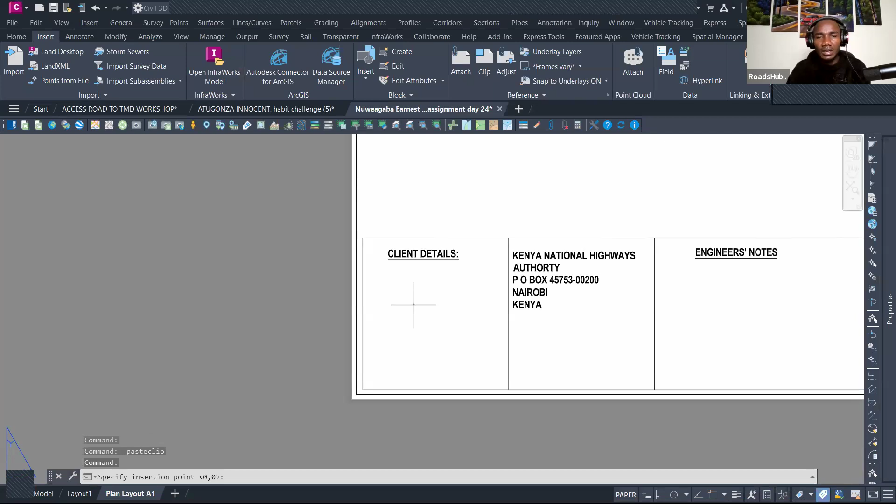But then you can use the other method. For example, let me just pick a random image. I don't know whether I have my logo. Let me just pick this one. I can actually copy, and then once I copy that, I can come directly here, and then Control V, that is paste. Sorry, let me just Control V. I don't know whether I have it. Didn't pick that. So I can just copy this one, and then I'll come and paste.

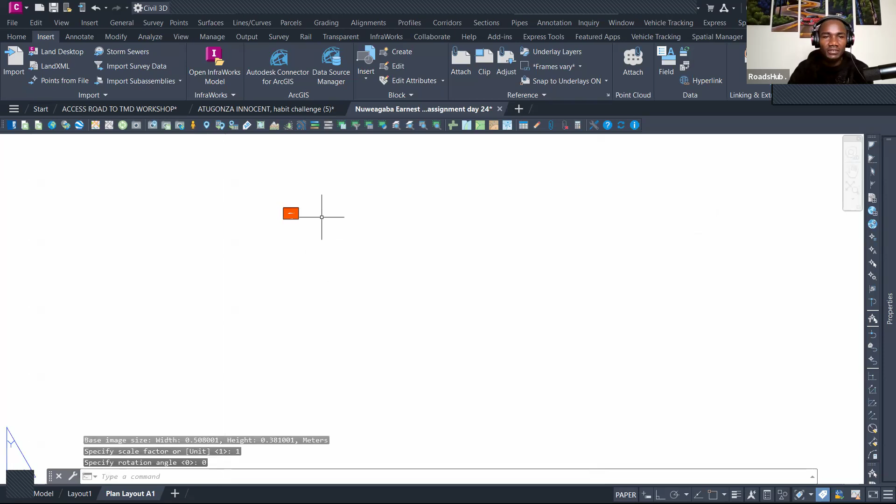It's asking me to specify the insertion point, and it's asking me the scale factor. So I can just use 1 for now, and then rotation angle is 0, and that's it. So I have it right here. You'll notice that when you insert the image, it can be very small, and you want to resize it to fit the section. So you just need to select it and then use SC for scale, press enter. You'll select the corner that you think is the midpoint, and then you can expand it. Once that's on, you can move, just type move, and then you're going to fit it in specifically for your section here.

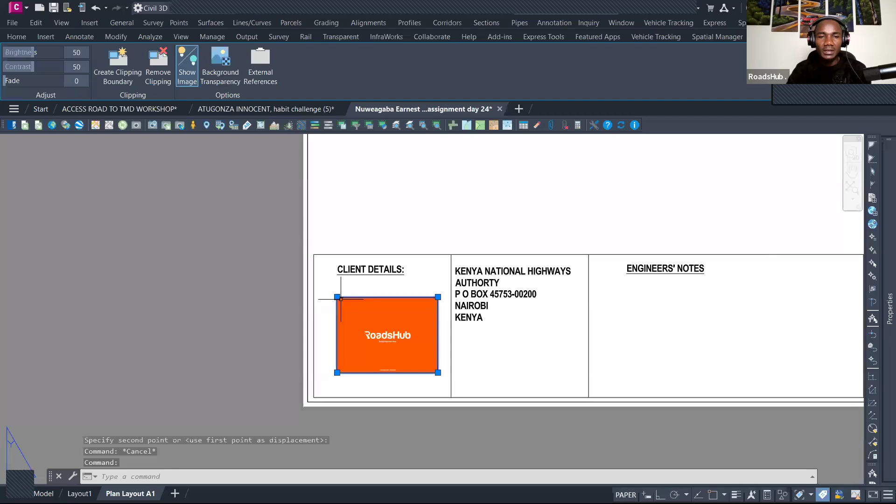Remember, these images, you can just download them from anywhere on the web for your employer. Then after that, this one is always the consultant. So you just need to copy this section again, copy, and then you're going to have it here. We have seen this 50-50 is working for us, so we can offset these to 50. Yeah, it's dividing it fairly well. And then you can also have the image as well for the section right there. Just copy this one.

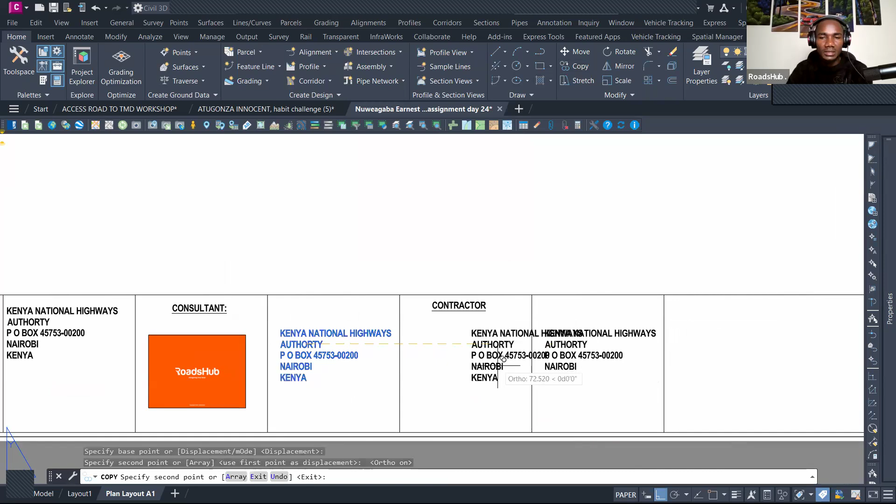And then after that, we have the contractor. Most sections will have the contractor right there again. And then also you can copy these. Oh, sorry, before we copy, let's do the offset for 50, and then for 50 right there. Okay, we get to have that, and we can copy this into that, and then also copy this from here to this other point. Okay. So we have the contractor, the employer.

This one, be creative. If you have a company, if you have any information that you would want to display in this area, you can display it as well. But also it's important to ensure there is alignment between this text that we used here.

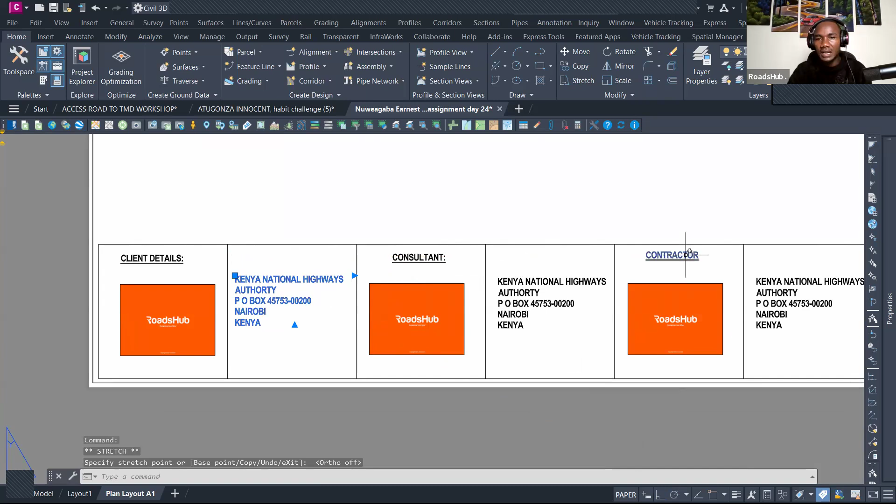It's very good, just like there is alignment on this other side. Remember, it's also good to offset this one up to this other area so that there is a good section right there across the area. So you have the contractor, you have all of that, and that's super.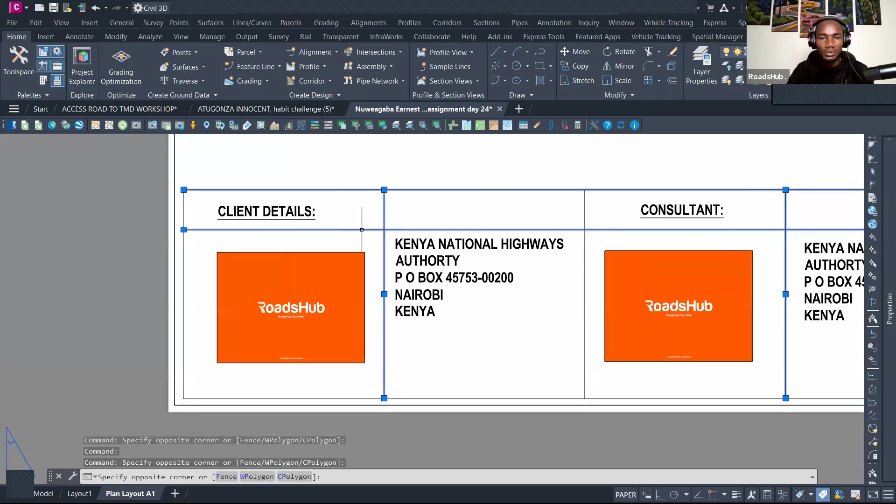We can decide we don't want the midpoint that is displaying the logo to be crossing over to this other end. So we don't want that. And we don't want this one to be there. So everything looks well organized now.

And then after that, we have the project team. You can see, for example, in this case, there is the project team here. This is mostly under the consultant, if there is need for it. But sometimes I don't really find the need for it. This one is mostly when you're sending to the other client and you want to identify names.

But most important is this section for submissions, revisions, checked by, designed by, and all of that. This is the section where you can include the specific names of people and then the project name right here. So we're going to this other point.

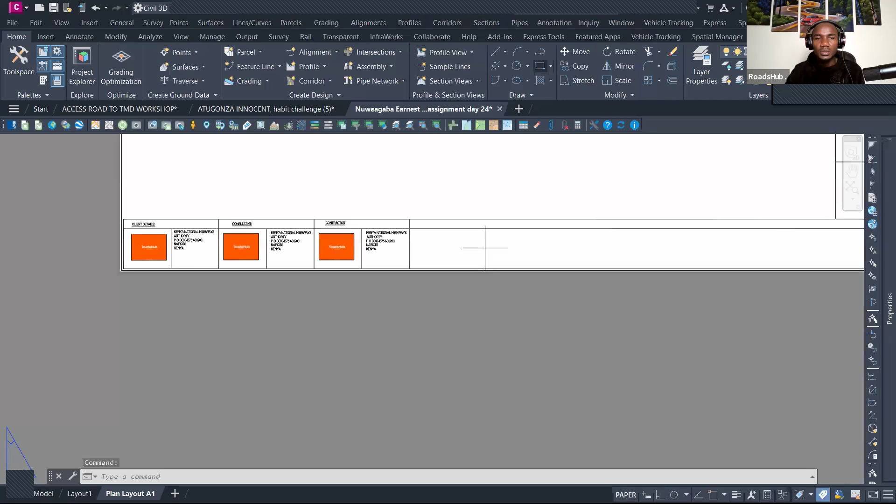I can just use a rectangle here, and let me choose the dimensions. I want it to be 100, and then the width is, oh, sorry, I didn't get the width right. But I can always push it back up to this specific point. I'm going to explode it. And I can do an offset of 10 for this side, and an offset of 10 for this other side.

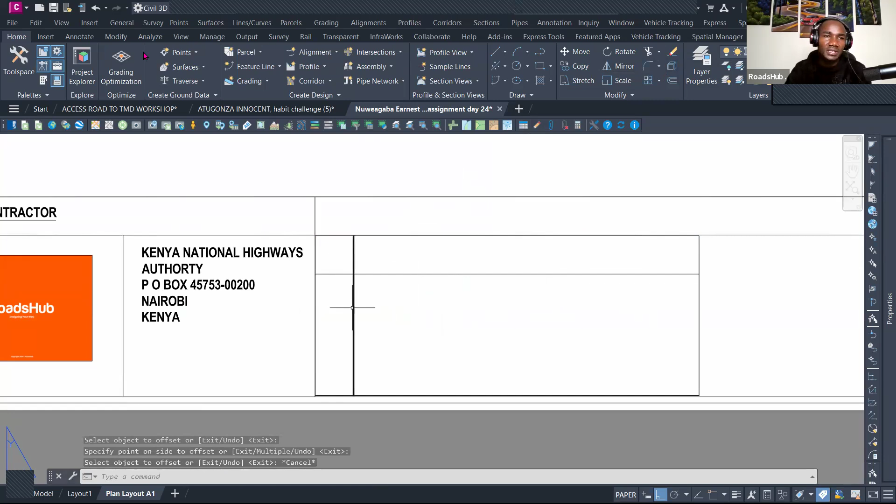Then after that, you can see I have a text called revisions. These are the number of revisions that we need for this area. So I can have the text there and then rotate it. This is the revisions. Oh, sorry. So these are the revisions that we need.

This one, we divide it into smaller sections. We can use 7.5 for this one, this one, this one. And then after that, we do an offset. Again, this one is for 50. This one is going to go all the way there. So we have checked by, designed by.

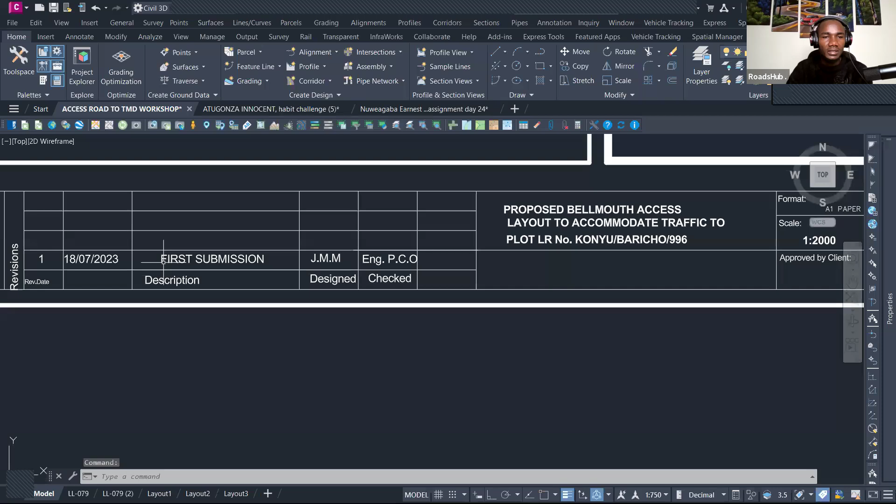If you go back to the template here, we have the submission, the description, designed and checked by. So there's date, description, designed by, and checked by. So there should be 3. Actually, let's delete that. We do offset, and this one we can make 20 for the date. And then we do offset for description. We make it 30.

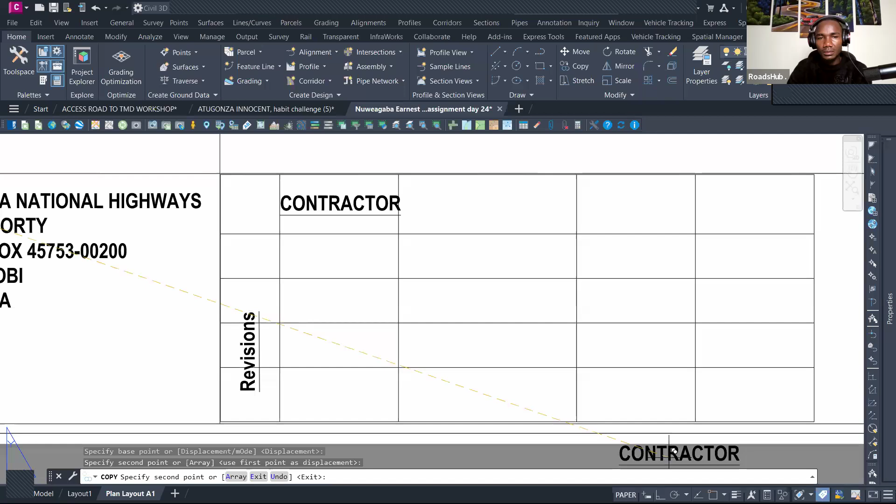And then checked by, designed by, offset. So with that one, we just use this text here quickly. One. I know we don't have a lot of time, so let me finish this very quickly. One, two, this one. So this is for date.

Escape. This one is for description, escape. This is designed by, escape, and then this is checked by, escape. And then what needs to be done is trimming of these edges right here.

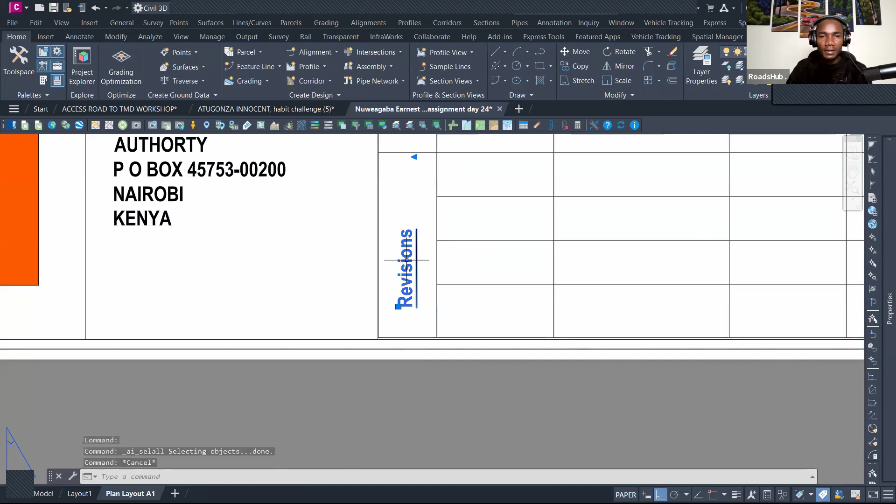So trim. We don't want to have, oh, sorry, we don't want to have this. We don't want to have this. So we can delete this. Trim. We have that. And we don't want to have that. So this text here will be Control A. I don't want this to be underlined. I don't want this one to be underlined, and that's it.

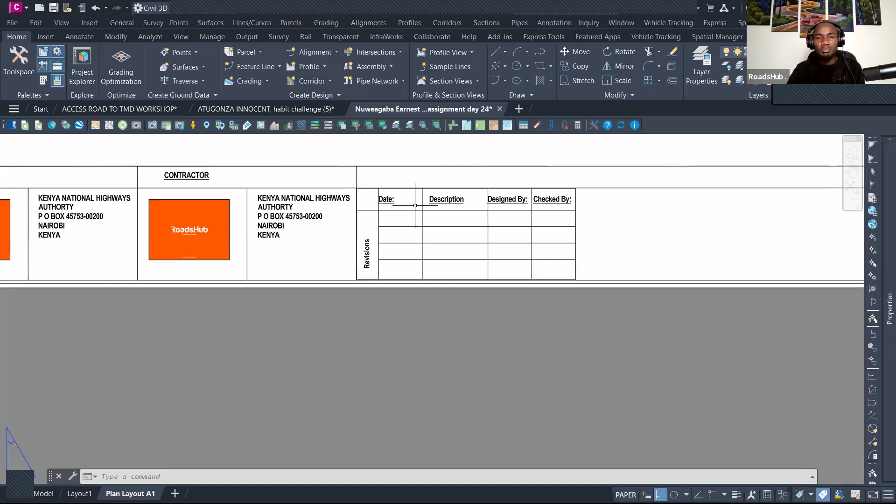So at least we have our entire title block set there. The only things left will be the size of paper and the signature and sheet code on this other side. Remember, you can customize this according to your preference. This allows you to do things your own way and show the information you want to display in this area. People will tell you there's a standard, but ideally it's up to you to decide what exactly you want to display in your design and the information that matters to you.

So once you're done with all of this, we are going to select everything. That is after you have done your customization, your modifications, and all of this data. And then after that, you can go to home, go to insert, and then create a block. And once it comes to create, you will call it title block.

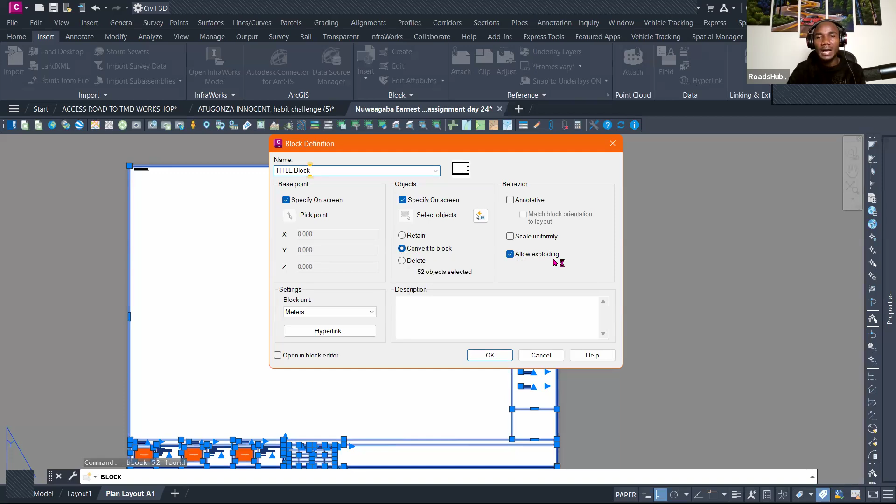Block, and then the base point you can specify on screen. The objects are already the ones that are selected, but if you want to select on the screen, you can do it there, and then it's going to convert everything to a block, and then you're going to allow exploding. That is in case you want to modify later on, and then you can press OK. So the base point for this one, I always prefer using the bottom edge, this point.

So let me activate this. I can always use that one to be my base point. So you will notice that, for example, if I go to insert. Sorry. Let me see whether it has been able to, let me see. It has not. Oh, yes, it is right. Oh, no, this is the TMD one. So I think it has not accepted this as a block. Let me see whether that's the case.

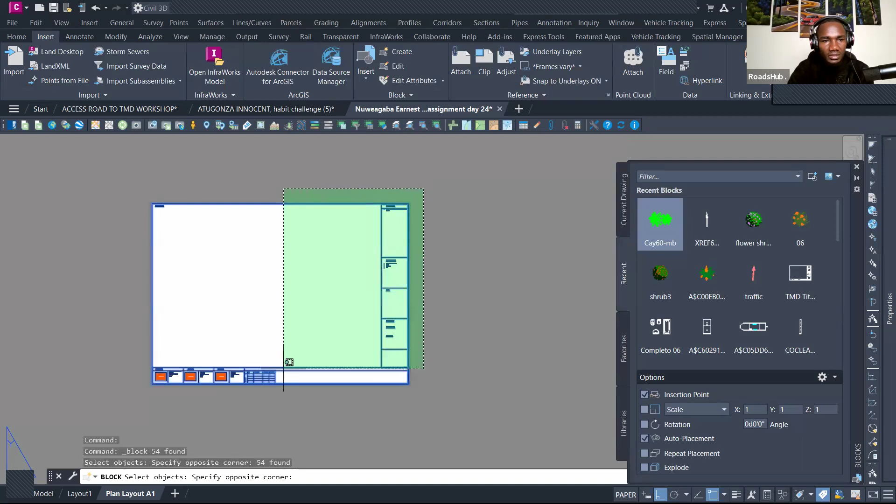So I'm going to repeat the same. Insert, create block. I don't know whether it accepted. It didn't pick, huh? So I'm going to call it title block. And then, for example, the objects, if I don't want to specify, I can specify them now. Yes, I can specify now. Press enter. These are the objects. And then if I want to have a description, I can say Earnest TT, and then I press OK.

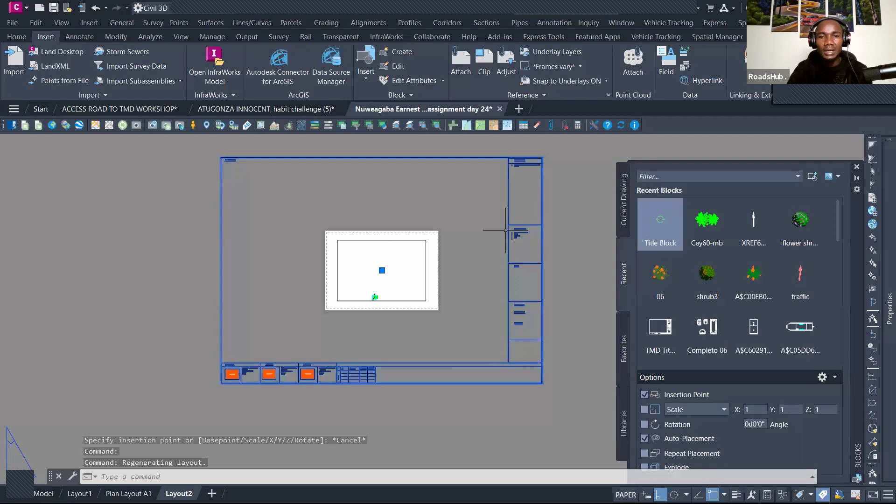And then I say the base point is actually at the middle. And you can see it has populated here. So this one is now a block that we can use. So even if we go, for example, to a new layout and we want to insert a title block, we can always insert this one right here. Let's say insert, and you can see it has been inserted already, according to the size of the paper. The paper here is very small, but this is for the A1 and it's super big. Kindly remember that you can always modify the paper size according to the size that you have.

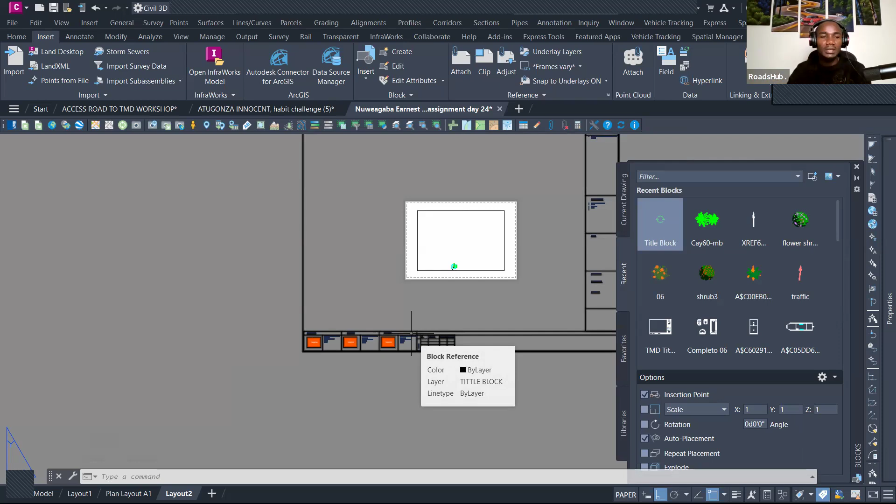So the only thing that is left here is to insert, for example, the viewport. Remember we said insert the view, and we want to insert this one right here. Okay. And then just press enter, and we'll put it right here in our design, and then we can modify the viewport, let me remove this one, so it can get all the way to the edges of our design. And then after that, we can right click inside here.

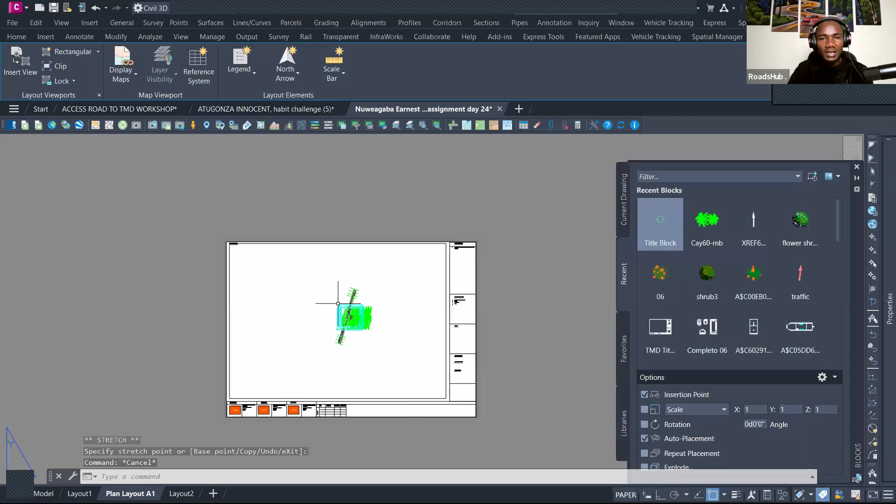Let me escape and remove these. We can select the viewport, unlock it, set the scale to 1:1000. That was the scale. And then right click and then regen. Okay, and you can see now the design is fitting in. I will show you how you can show different sections. We can show this section here, we can do another section here, and we show another section in tomorrow's session.

So thank you very much. Please make sure you design your own title block. Use your own taste and preference. Look around for other samples and see what you can come up with.